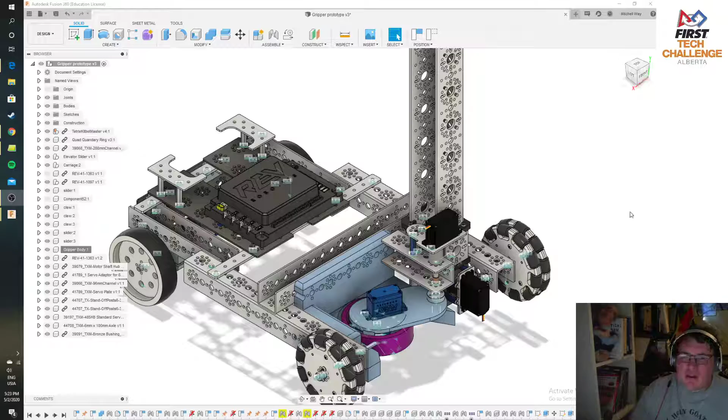You'll notice that I haven't been around much in the last little bit for some of the CAD things. You've got the skills you need to go through the next few weeks after those first few. On top of that, I kind of sent myself down a rabbit hole with the week 3 gripper project. I know at this point we're probably a couple weeks ahead of that, but I wanted to show you what I came up with.

Everything that I did here is based off of skills you had from the first couple weeks. You'll notice a lot of the light blue on this one, and this is just my gripper demo. Everything I did in blue is actually 3D printed. There are a couple white and black ones, but everything else is a stock part. We've got our basic Tetrix servo block over here, same thing down here, except I've attached it to something that's a little bit weird.

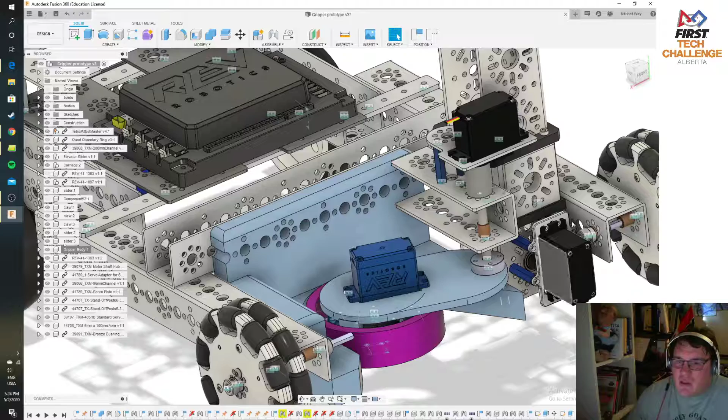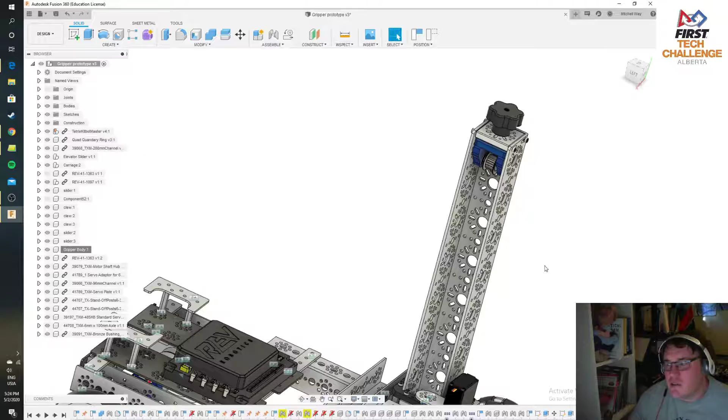Some of our friends over at Studica actually sent this over. This is going to be their linear slide kit, and I've been told this should be available towards the late part of spring, and for sure for next year's FTC season. This is kind of a cool thing, and I'm just going to show you this one. It actually has a tooth pulley at the top, and it has a tensioning knob so you can very easily tension that system, and those two things run down into this bracket down here.

I'm going to assume this is some sort of hard plastic in order to make this work. You'll be able to clip your pulley in here, and then you'll see that this whole thing right here actually lifts itself up and slides along that rail, allowing you to move this with a servo on the bottom. This is a cool idea.

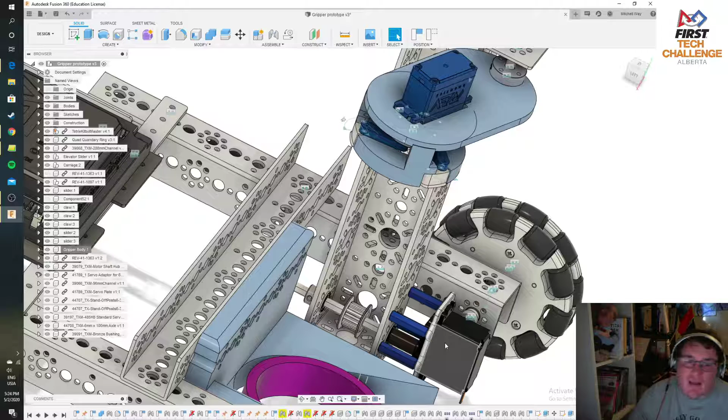I think this is going to actually be something we very much could use. I've attached a few pieces to it, tried to keep the weight relatively down, but I want to talk through the design I put together because it uses some CAD skills you have, but it also uses some design skills that you should use.

When talking about how to manipulate a game piece in any FIRST Robotics game, one thing to keep in mind is: how am I going to get this to my gripping mechanism? We had some great grippers in the actual CAD challenges, and they were really good, but a lot of them - and this is a problem I see with a lot of especially rookie teams - create a gripper that involves chasing the game piece around the field.

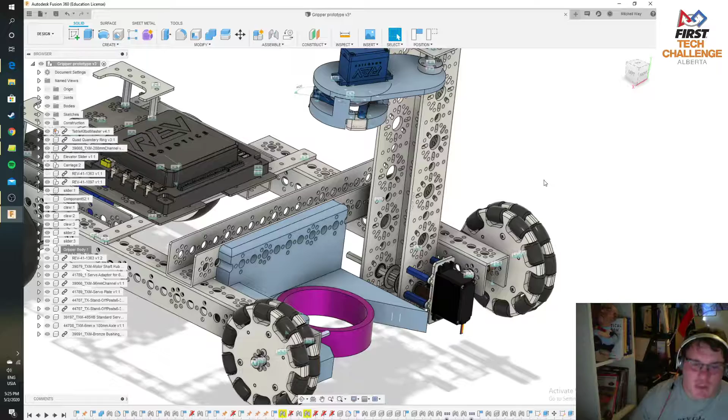It's always better in a robotics game to create something that has an intake. An intake can have two forms: it can be passive or active, and we're really familiar with the active intake - wheels to pull an object in, or a roller with surgical tubing to pull an object towards you. But this one actually takes advantage of a passive intake mechanism.

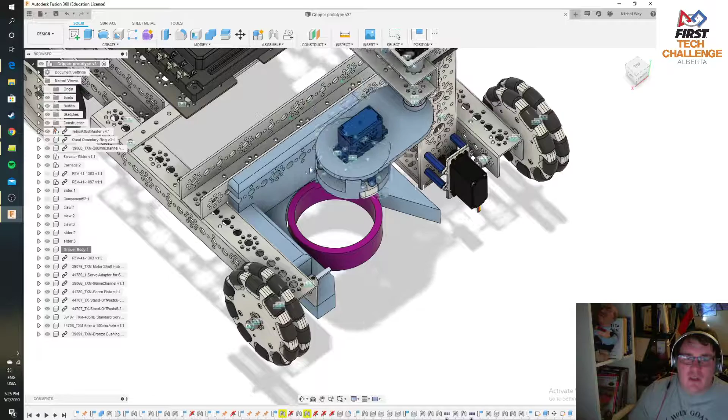This ring is going to fall into this 3D printed part, and it's going to sit pretty much exactly here. I've built the 3D printed part to be about a millimeter and a half wider than the ring, so that as soon as you drive into this ring, you're pretty much set. Because everything's servo-based, you can actually just drop this whole mechanism down into the middle of the ring.

I'm actually going to take a top view here just so I get the thing lined up properly. In real life, you'd have a bit of a time trying to make sure everything got where it was supposed to be. Now let me show you what I've done here, because this is kind of cool.

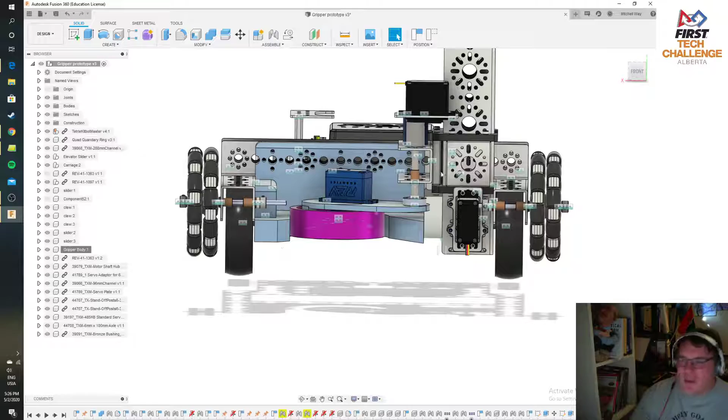With the ring sitting naturally in here, and you'll notice I used the Tetrix kit bot - in reality, this whole mechanism would go on the front of a robot with level wheels, and this whole thing would sit flat and we'd be all good. But in this case, if we slide this ring in, we are able to drop our mechanism directly into the middle of it. There is no chasing at all. You simply drop the mechanism in, life is good. And it's often really easy if you can get the game piece into your robot.

Now, we built the linear slide in this case.

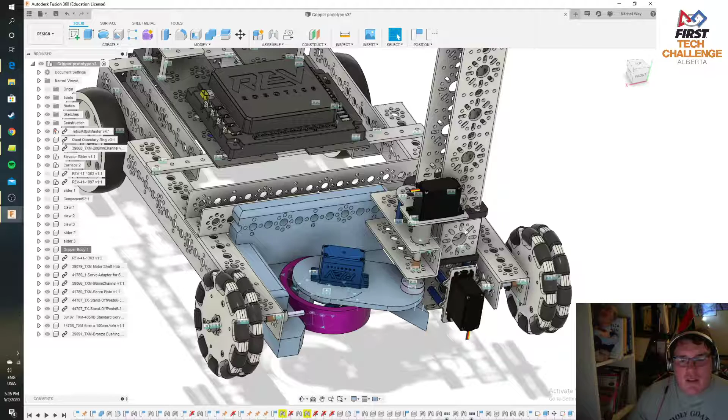I've also got one servo here to move this thing around, and right now I can't actually move the ring with the animation I have, but I want to show you the gripper, because as soon as this gripper drops down and this servo activates, something really neat happens. I'm going to drag this up and show you the full claw mechanism. I'm actually going to swing this out here because it's on a rotational swing. This will allow you to throw the ring out in front of you and potentially drop it.

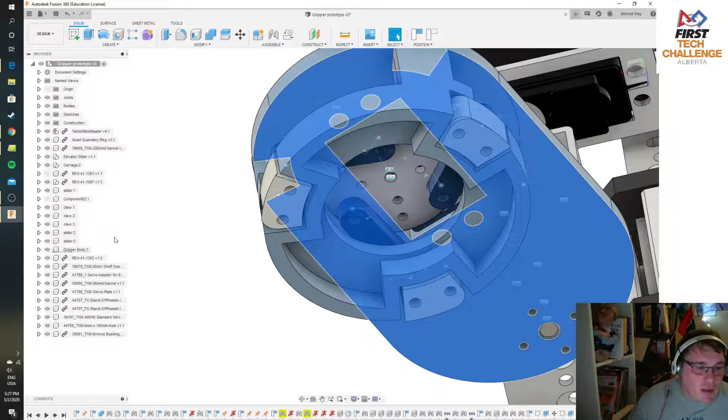Now, in order to show you how the gripper works, I'm going to zoom into the bottom of the gripper and take the gripper body. You'll notice I've actually named all of my parts down here in my browser. This is generally good form, to try to keep it so you can find stuff that you need. I'm going to ground the gripper body.

That just means it can't move, it's stuck where it is. Now you notice what I've done: I've created all 3D printed parts here, and in reality this bottom part of the gripper and the top part would probably be two separate parts that we'd bolt together in some way, shape, or form, just because of the amount of overhang we have here. But that's a minor thing; we're just prototyping at this point.

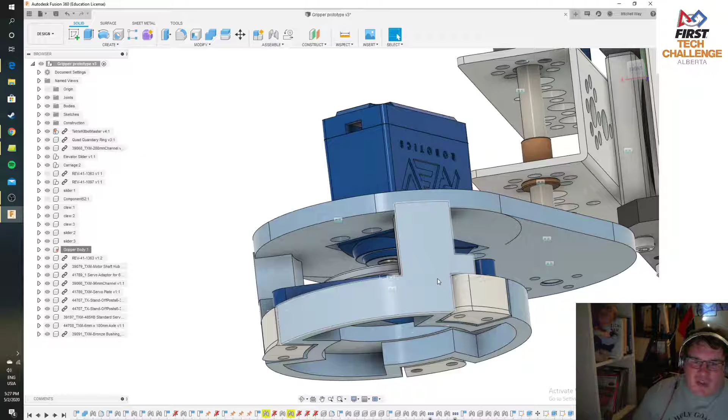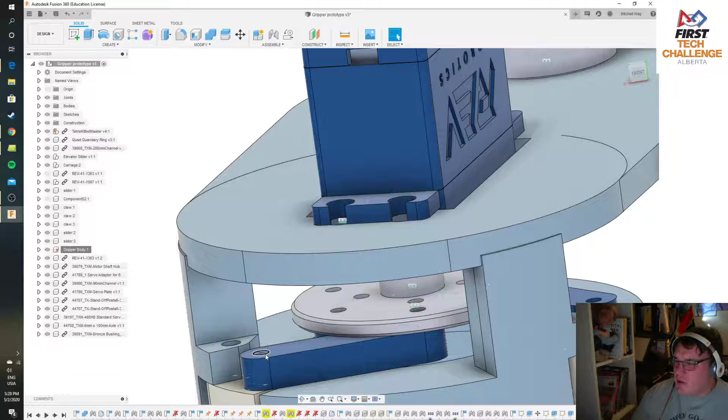Basically what happens is we take our Rev servo, or any brand of servo for that matter, and drop it through here. I've used a simple Tetrix aluminum servo plate here just to make sure this works. All of my joints in this case would use some version of an M3 screw, bolted in. I haven't worried too much - a couple of these would need countersinks to make this work properly, but basically this allows the servo to move.

Now you'll see that when I move the servo, these linear slider arms are going to allow the outsides of this plate to move. And if we zoom around to the bottom, we can see the whole mechanism in action. We can actually see that as we turn this, we're going to get movement in and out.

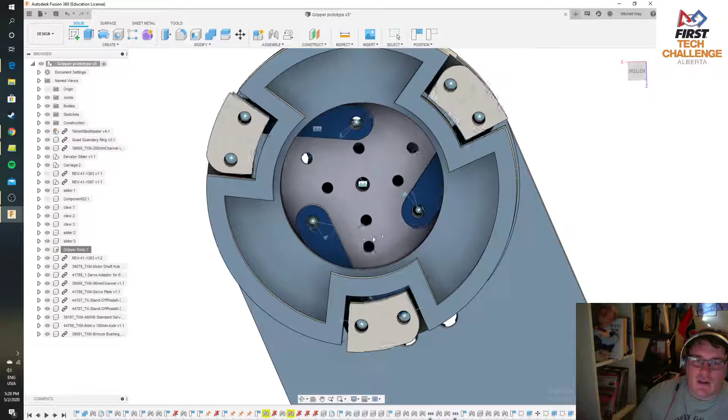This is going to allow us to grip that ring. You'll notice that these aren't perfect rectangles - there's a little bit of a lip along the bottom. Zoom in and see, there we go. A little bit of a lip along the bottom so that when these move - grab my wheel here - you can see they move out and they'd be able to grip the bottom of this. Some teams would also use things like foam tape to do this particular maneuver.

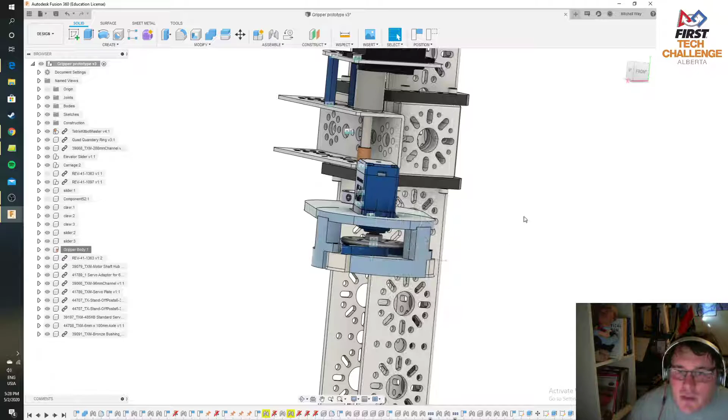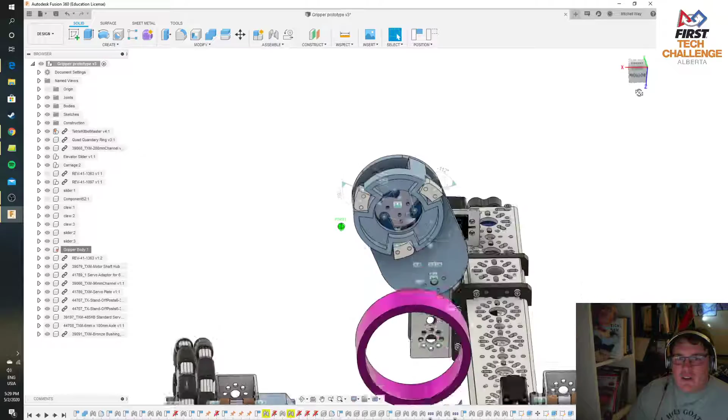Now everything here was based off sketches of other parts in the design. You'll notice that when I move the ring here, just to test my dimensions, the gripper itself is about 2-3 millimeters smaller than the actual ring. But what happens is as soon as I drop this gripper down into the ring, I'll be able to expand these out, put pressure on 3 sides of the ring, and make sure I can place it exactly where I need at any point.

This is part of that design process - asking yourself not just how you could pick up that ring, but what is the most efficient way to pick it up. In FIRST Robotics, FTC especially, you have 2.5 minutes to actually get through your match. And if you can cycle 1 or 2 times faster than your opponent, you're probably going to win more matches than you lose.

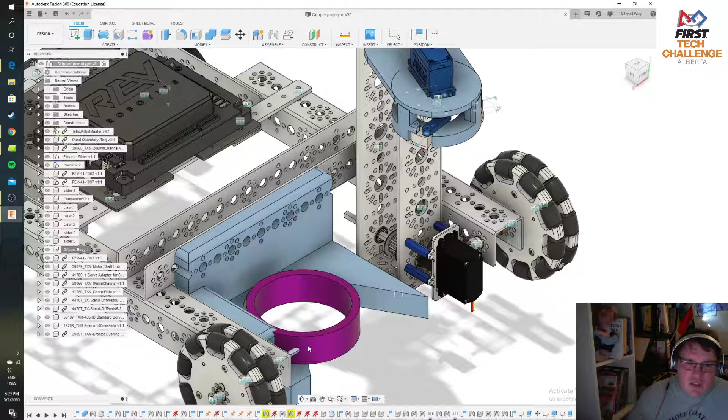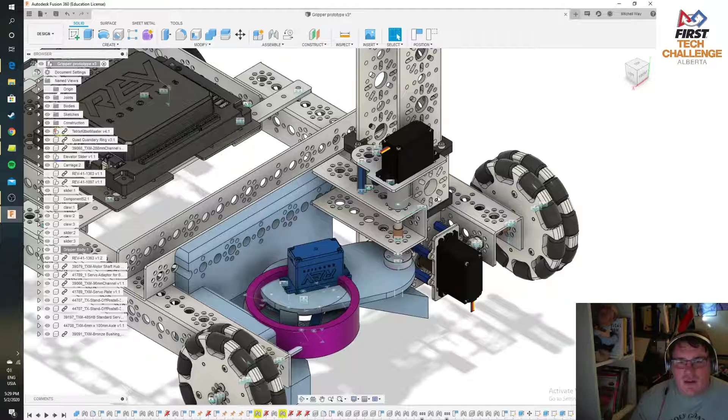In this case, this makes it easy. Drive into your ring, very simply drop it into your passive intake, move your gripper so that it drops down in, and have your servos preset with buttons already set so you can drop this thing down. Expand your gripper out, and off we go to the races. Lift it up, move it out, drop it wherever you're going. Easy enough.

And that's the design process you really should be looking for - the idea that you should have a multi-part, potentially linkage, between a passive or active gripper, some sort of gripper for the game piece, in a way that it really can't miss.